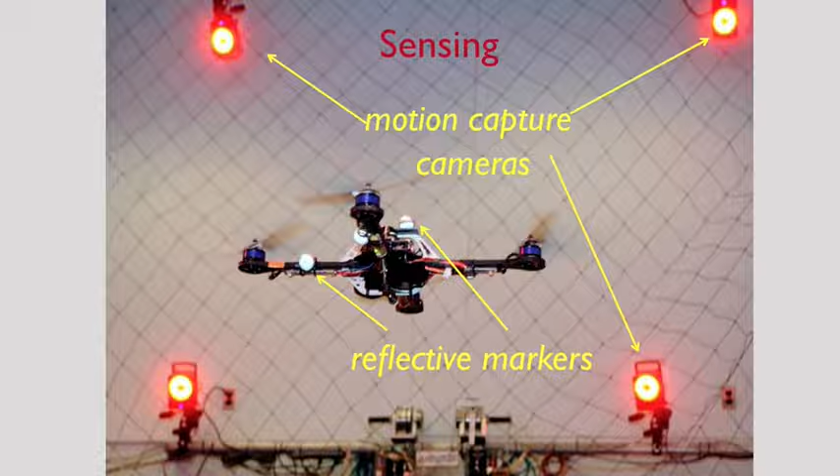In the lab, we have motion capture cameras that allow the robot to measure its position. Through reflective markers mounted on the robot, the cameras can estimate the position of each marker at speeds exceeding 100 to 200 times a second. These measurements are incredibly precise, with accuracies well below 1 millimeter.

If you go outdoors in general, you might not have GPS, or your position estimates from GPS can be very inaccurate, especially next to tall buildings. Indoors, it's hard to get GPS, and we'd like to operate both indoors and outdoors. Because these vehicles are small and maneuverable, they can find themselves in settings where it's difficult to communicate directly with them. We also want these vehicles to move quickly and maneuver through complex environments.

How do we navigate without GPS, without external motion capture cameras, or any other external sensors? Imagine the vehicle is equipped with sensors such as cameras, color plus depth cameras, or laser range finders. These sensors allow the vehicle to infer information about the environment, and from this information, localize itself.

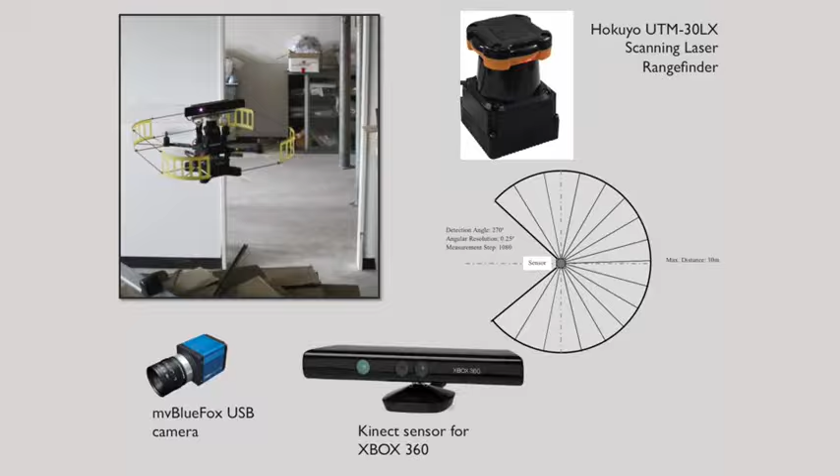So you have some estimate of delta x, and when it gets to this new position, the rangefinder estimates the positions of the pillars it had measured previously, except now these range estimates D1 prime, D2 prime, and D3 prime are different from the original depth estimates D1, D2, and D3. So the question is: can the robot concurrently estimate the locations of the pillars and the displacement delta x?

So you're trying to estimate these 8 variables: 3 pairs of xy coordinates for the pillars, and delta x. This problem is referred to as simultaneous localization and mapping, or simply SLAM. The idea is that you're trying to localize yourself, estimating delta x, while mapping the pillars x1, y1, x2, y2, and x3, y3.

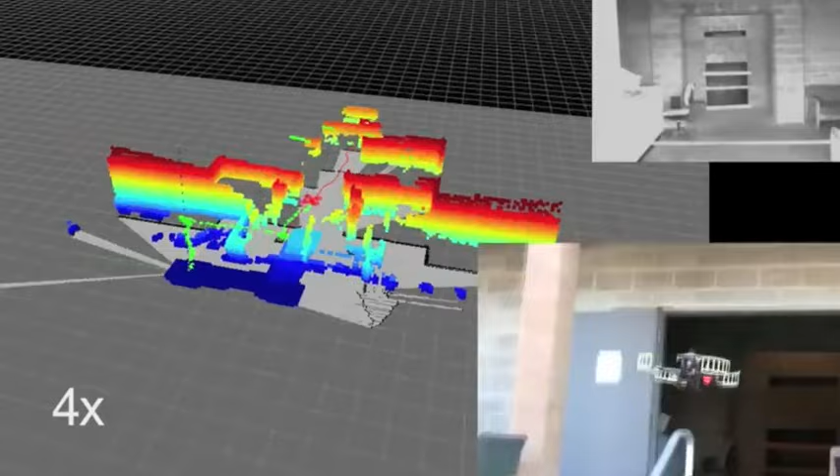In this video, you will see a robot entering a building it hasn't seen before. It uses the SLAM methodology to map the three-dimensional building while estimating its location relative to features in the building. The map it's building you can see in the central screen. The blue colors are the ground floor and the red colors are the top floor. There are intermediate points where the vehicle plans its trajectory.

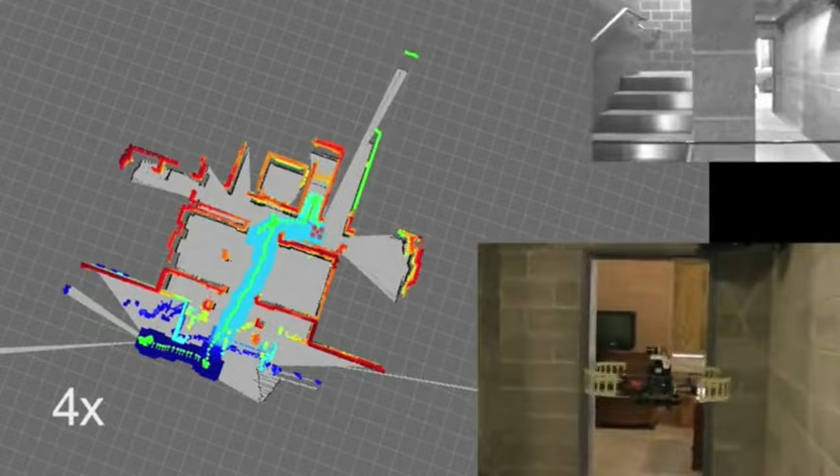If you look at the red snaking curve that emanates from the vehicle to goal points, these goal points have been designated by an operator viewing this map and tasking the vehicle. The vehicle does everything else. In other words, you can click and point your way through this building without entering it, while getting information about what's inside.

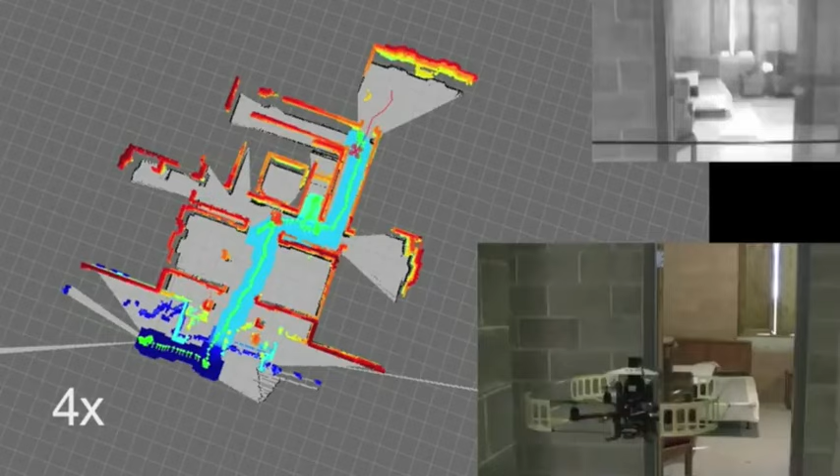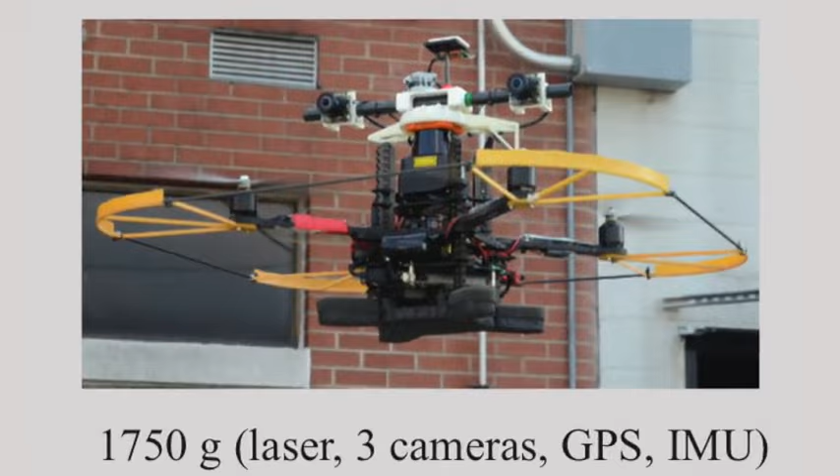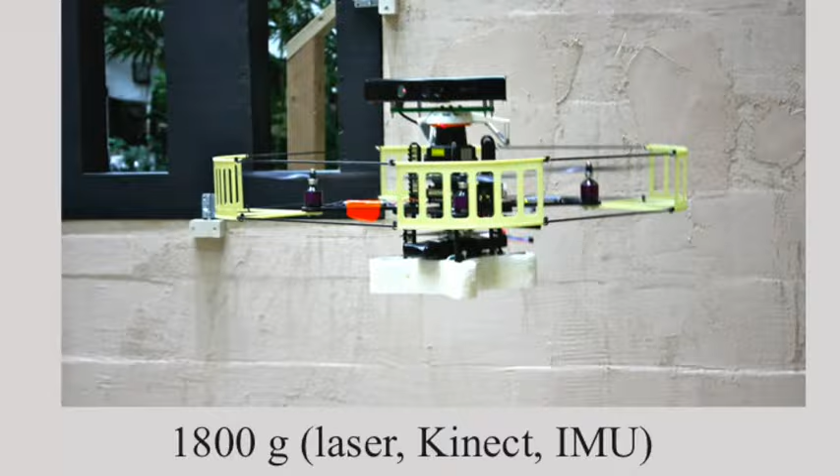On the bottom right, the vehicle is instrumented with an RGBD camera, red, green, blue, and depth camera, which you can now get as part of an Xbox video entertainment system. It also has a laser scanner on it. You can see that each vehicle has a different mass and size, and the reason for that is very simple.

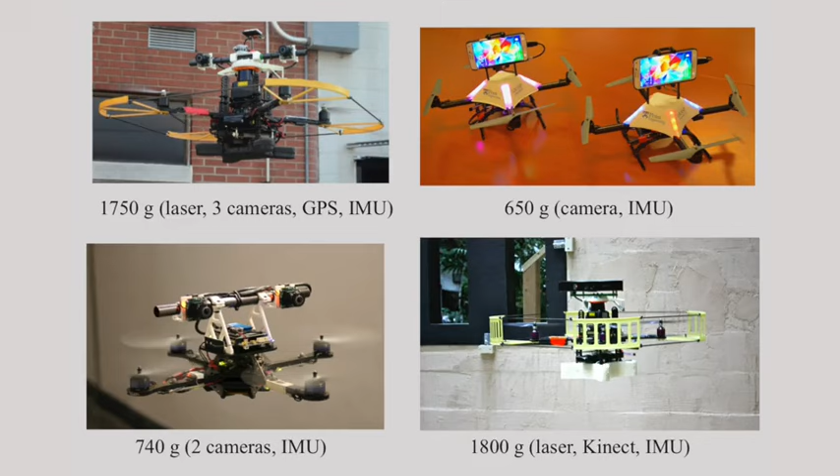As you put more hardware on the vehicle in terms of sensors and processors, the vehicle has to become bigger. To support this weight, you need bigger motors, and to support those motors, you need bigger props, which in turn requires bigger batteries. Here's another vehicle we use for instruction in our classroom, and this one just has a single camera and an IMU.

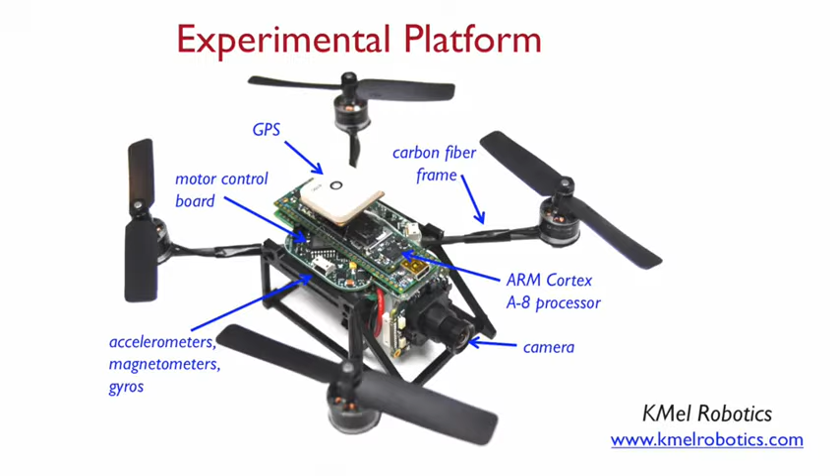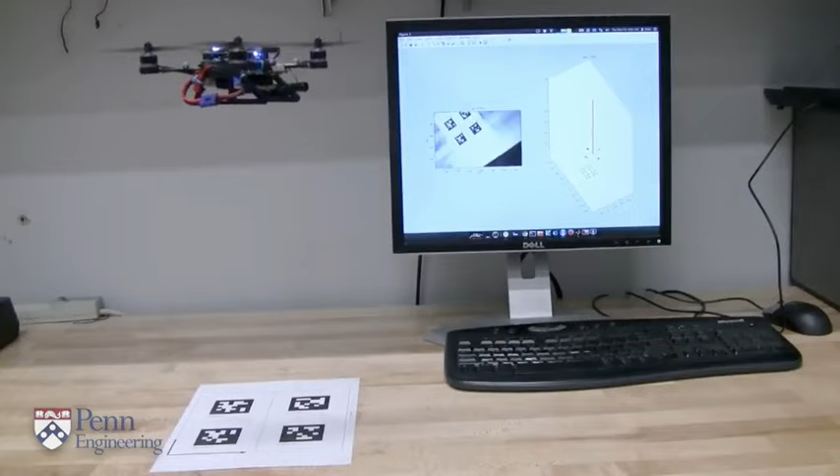Because it only has a single camera, we instrument the room with beacons. These are April tags, and as you'll see in this video, the vehicle is able to localize itself with respect to these beacons and hover, estimating its position and velocity relative to the beacon and hovering autonomously.

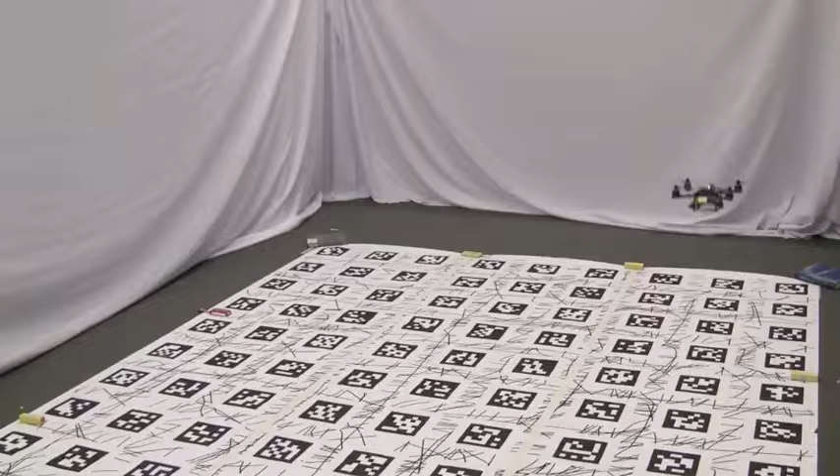You can switch between small markers and large markers, which allow the vehicle to control its height. And if you have lots of these markers, you can navigate over larger distances. So in our laboratory, this is an inexpensive replacement for the motion camera system.

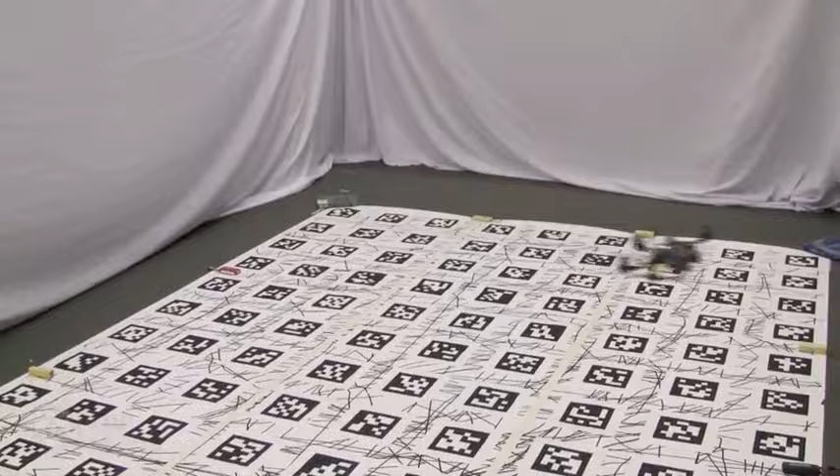Here it's a single camera, off the shelf and inexpensive, but we do instrument the environment with beacons. Because these beacons, the April tags you see on the carpet, are known to the robot, it's able to recognize them and estimate its position and orientation relative to the tags and therefore the environment.